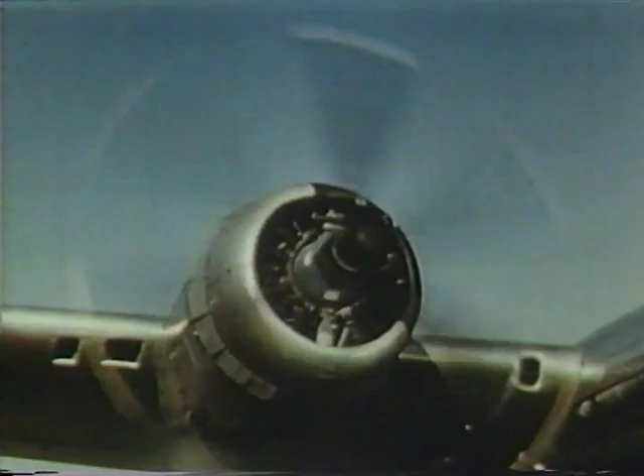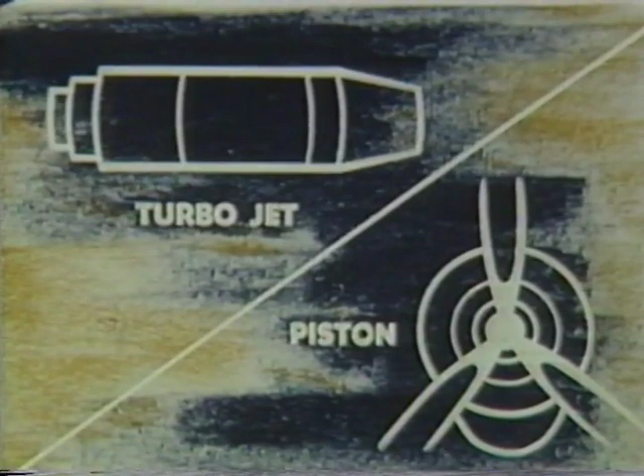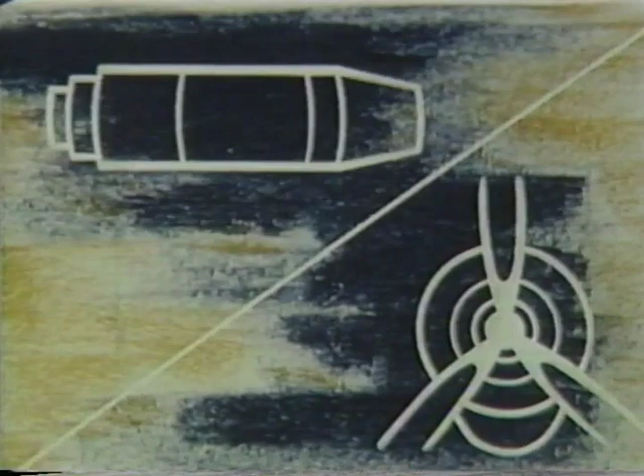For instance, the reciprocating engine is today's most efficient and most complex. The turbojet engine is today's most powerful and most simple in basic power section design. Somewhere in between lies a new kind of power for flight, an engine with the inherent power section simplicity of the turbojet, but providing also the high thrust efficiency of propeller power. And here is the engine designer's solution to the problem: a new kind of power for flight, the turboprop engine.

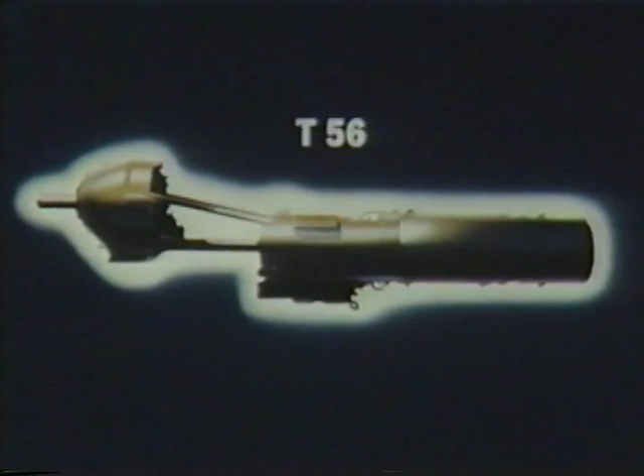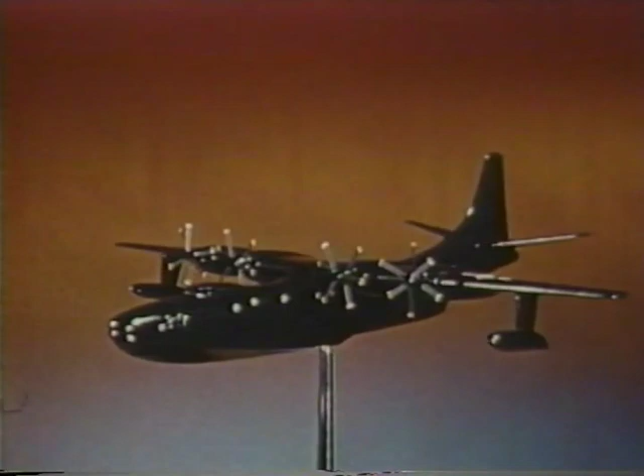More power and speed, less weight and aerodynamic drag, lower fuel costs. Here is power for progress for many types of aircraft, for greater speed, increased payload, shorter takeoff and landing runs, high rate of climb, and most economical overall operation at all altitudes.

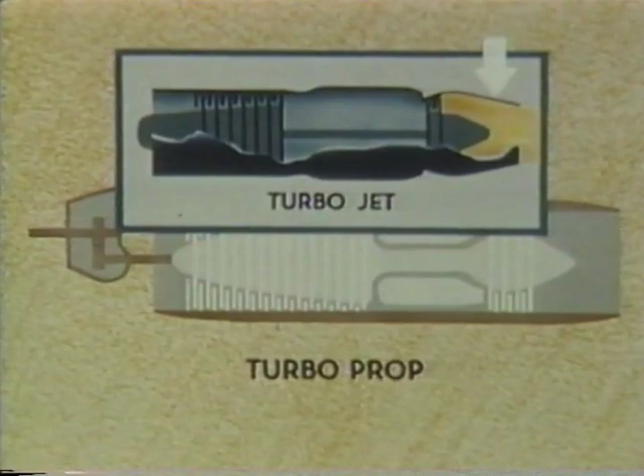A turboprop, like a turbojet, is a gas turbine engine. Air is compressed and delivered to the combustion section. There, fuel is added, and the mixture is burned. The expanding gases release tremendous amounts of energy. In a turbojet, a turbine absorbs only the amount of energy necessary to operate the compressor and engine accessories. The remaining energy becomes jet thrust by reaction from ejection of the exhaust gas at high temperatures and high velocity.

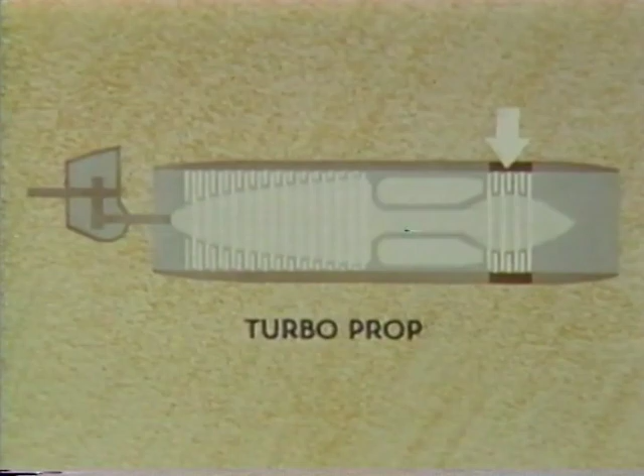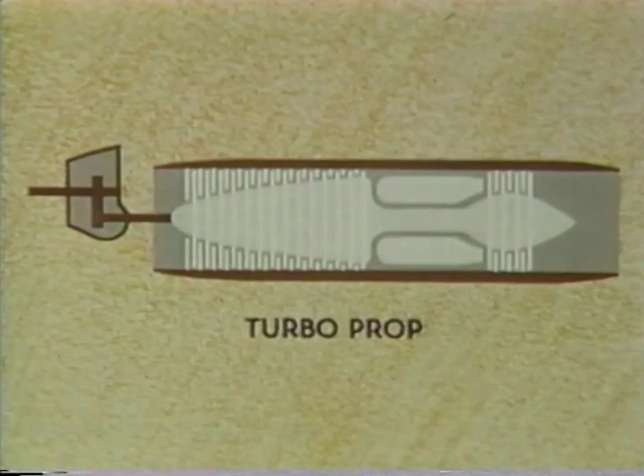In a turboprop, the turbine is designed to absorb maximum energy from the expanding gases. This energy is converted to shaft horsepower and used to drive a propeller through a reduction gearbox, as well as the compressor and engine accessories. About 10% of the turboprop engine's propulsive force is jet thrust, but all the rest, the main propulsive force, comes from the propeller. The turboprop engine has many advantages over the compound reciprocating engine of comparable power.

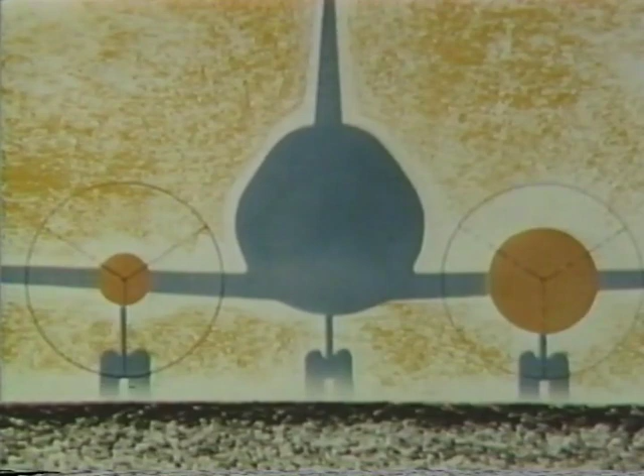First, it has less than one-third the cross-sectional area, and therefore less aerodynamic drag. Second, in terms of power to weight, the turboprop holds a 2.5 to 1 advantage.

The compound reciprocating engine delivers about 1 horsepower per pound of weight. The current turboprop delivers 2.5 horsepower per pound of weight, and this engine has ample room for power growth. Third, the two engines are roughly comparable in the use of pounds of fuel per horsepower per hour, even today.

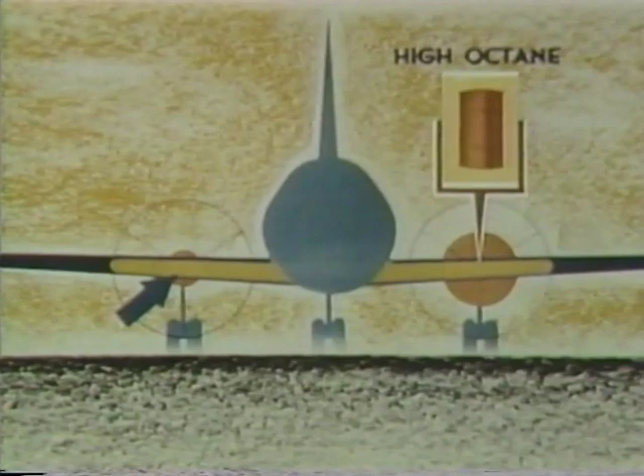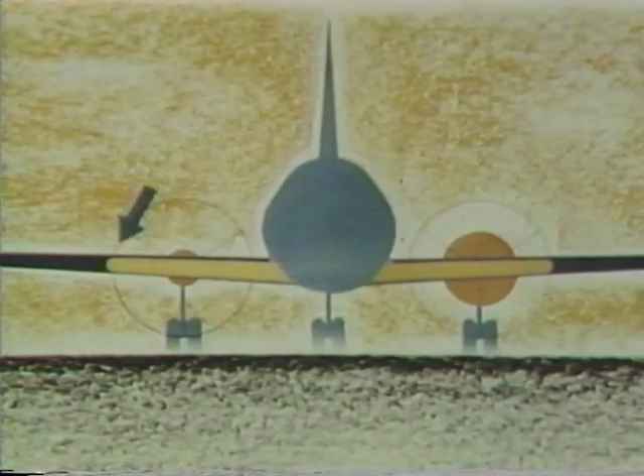But whereas the reciprocating engine requires high-octane gasoline, the turboprop, like the turbojet, can operate on any good turbine fuel, which not only costs less, but is in far greater supply. Moreover, the engine's lower weight permits carrying more fuel load for greater range, or more cargo for a bigger payload, further simplifying logistics. Fourth, in terms of maintenance man-hour requirements, the turboprop offers considerable savings.

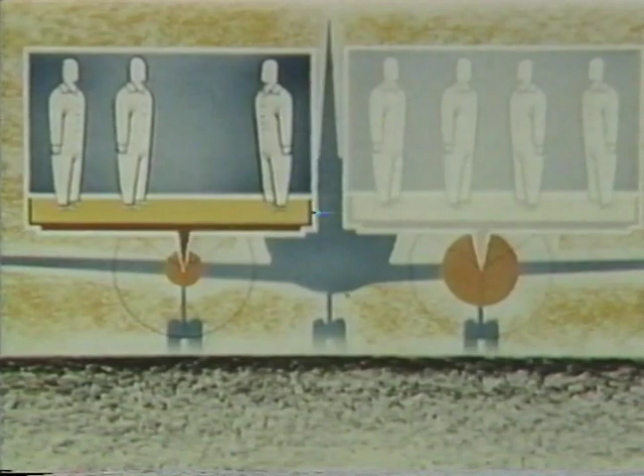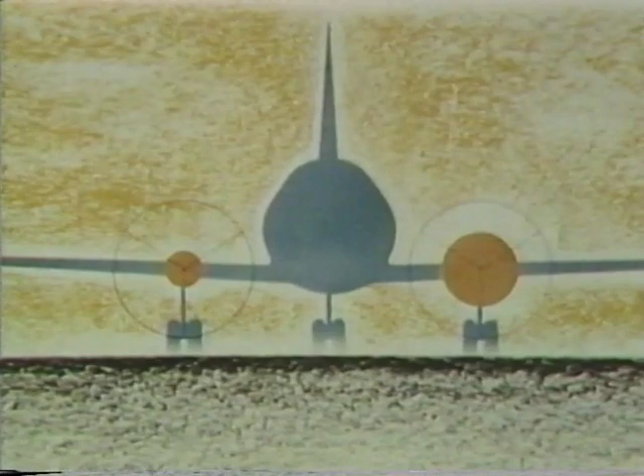There is far less time required for routine check work and minor overhaul on the engine itself, and less work is required on the airframe because of reduced vibration. Fifth, the simpler design of the turboprop results in more horsepower per dollar expended in manufacture. The difference in cost is almost the equivalent of 1 spare turboprop for every 4.

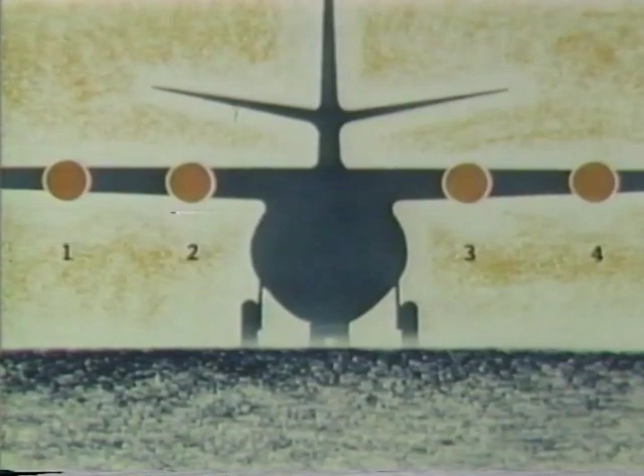These then are some of the advantages of the turboprop engine, advantages which mean progress in aircraft power for air transportation. Let's see how this new kind of power has already reached practical availability.

Development began with a request from the Navy Department, Bureau of Aeronautics. But the request wasn't for a specific engine. It was for any engine that would enable an airplane to meet certain specific requirements.

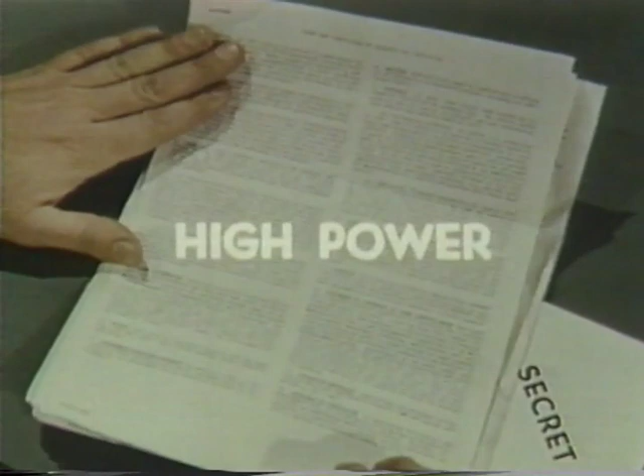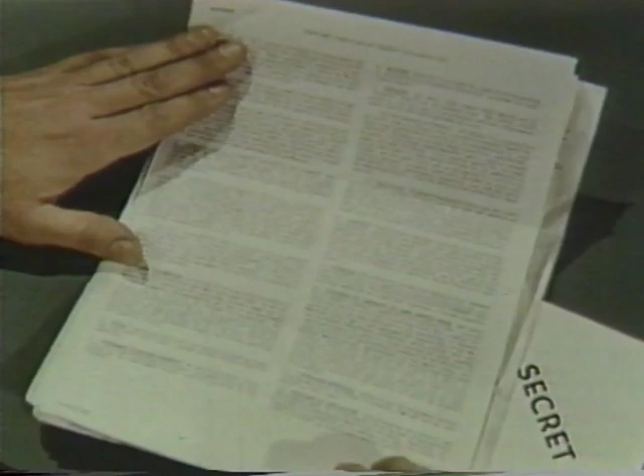This took an engine with high power, low weight, small size, low fuel costs. This request was for an engine which would enable an airplane to perform missions not possible with any known engine.

And detailed study ruled out either the reciprocating engine or the turbojet. And so a new concept was born, the turboprop engine.

The specific Allison proposal was for the T-40, an engine with twin power sections driving a contra-rotating propeller which could be clutched to either or both power sections for unusual flexibility of operation and economical cruise. To expedite development, the T-38 was then designed, with gearbox and propeller driven by a single power section.

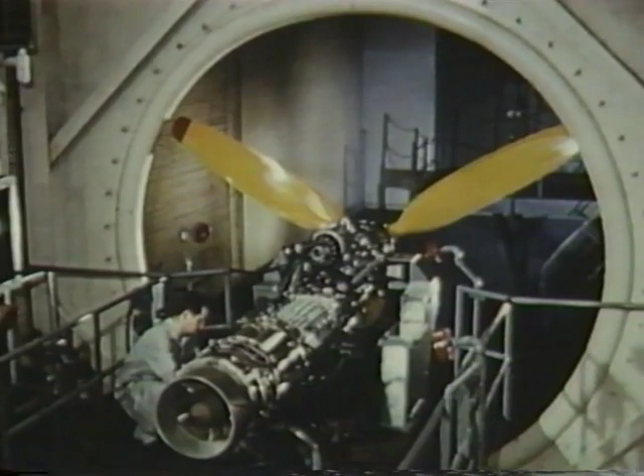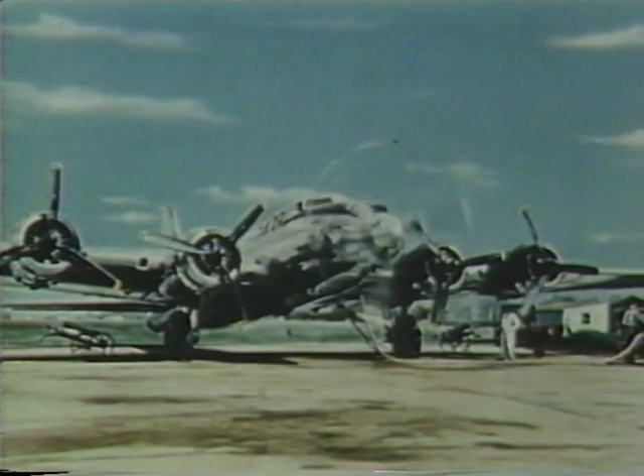Following tests of component parts, testing of the complete unit proceeded until the engine was ready for flight evaluation. A test bed was installed in a B-17. Standard flight evaluation tests were made, including tests for temperatures and pressures throughout the engine. One result of this work was the development of simplified coordinating and propeller controls.

The next step was to prove the turboprop engine as a practical power plant on its own. Military interest in the advantages of turboprop power for both existing and future aircraft had reached the flight test stage. For instance, the Convair XP-5Y flying boat and the Douglas XA-2D Sky Shark. Could turboprop power do a job in these planes?

Let's see. The XP-5Y long-range flying boat, built by Consolidated Vultee Aircraft Corporation, was the first American aircraft to fly wholly on turboprop power. The 4 Allison T-40 engines and dual rotation Aero Products propellers give this 70-ton transport a power-to-weight ratio far in excess of many World War II fighters.

The XA-2D carrier-based attack plane, built by Douglas Aircraft Company, was the first American turboprop-powered bomber to fly. The Sky Shark is powered by an Allison T-40 engine with dual-rotation Aero Products propeller. The XA-2D can carry a greater payload than any known jet bomber or fighter for the same expenditure of fuel.

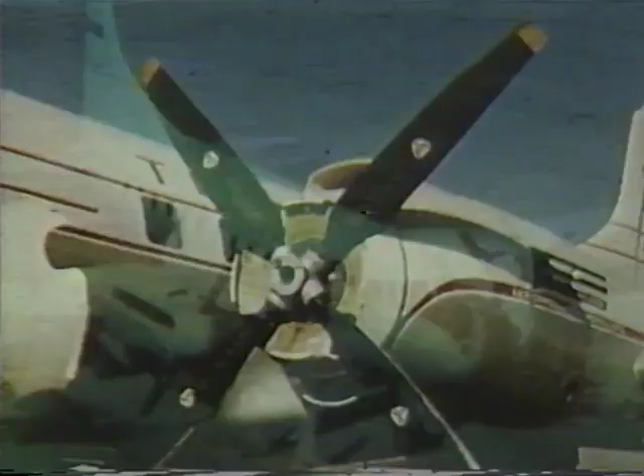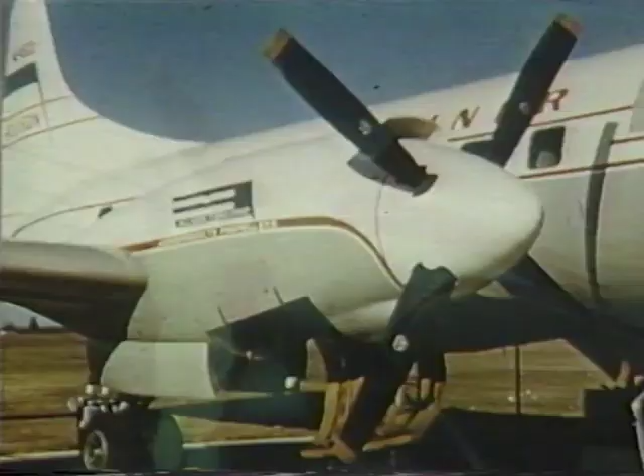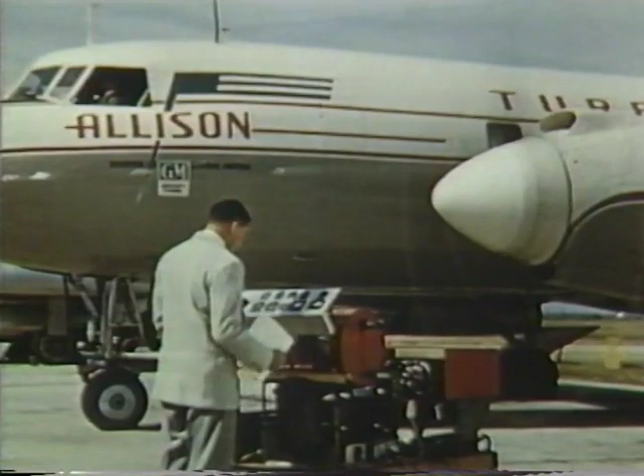In 1950, Allison purchased a standard Convair 240 for test purposes. One T-38 model turboprop was installed in each nacelle by Convair, and this became the Allison Turboliner. Because of landing gear design and other practical considerations, the standard nacelles were used. You can easily imagine how much smaller the nacelles would be in size and cross-sectional area if designed for an optimum turboprop engine installation.

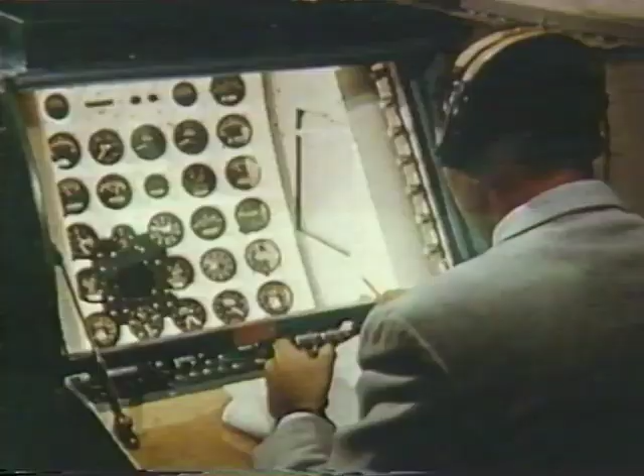Ground running began in November 1950. Three months of vibration and stress analysis uncovered no adverse vibrational characteristics in the engine, propeller, or nacelle. Early flight tests, coordinated with the ground running program, began in December. Flight information accumulated during hundreds of operating hours to date has resulted in further proof of the advantages of the turboprop engine and provided valuable information leading to still further improvements in engine design.

Remember that in the early phases of its development, the advantages of the turboprop engine were largely demonstrated by the T-38 and the T-40. Now let's look at the T-56, an advanced model sponsored by the United States Air Force. Progress in design has resulted in more power, higher possible flight speeds, and improvement in fuel consumption. Let's consider in some detail the specifications and characteristics of this representative turboprop engine.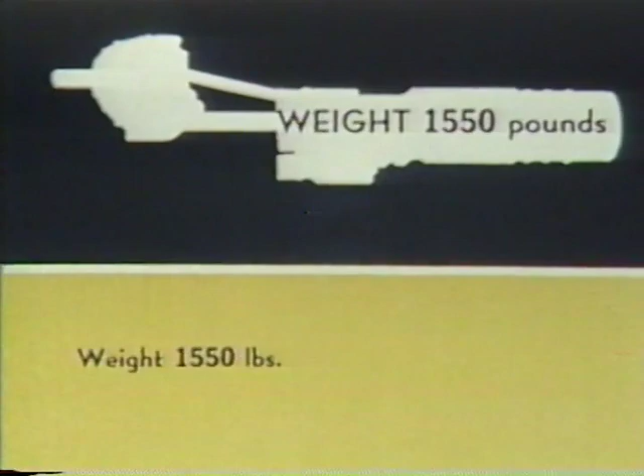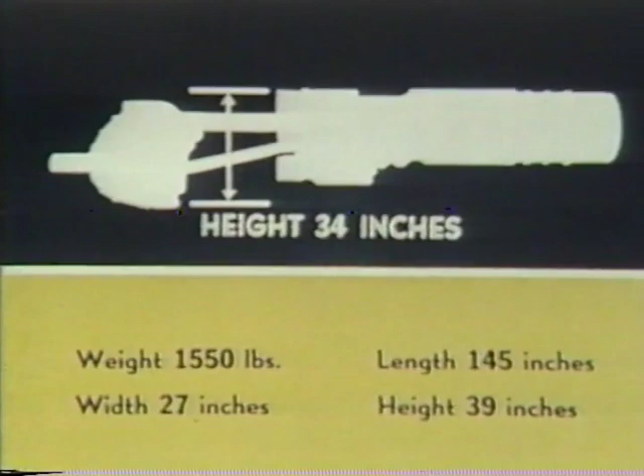Weight is 1,550 pounds maximum. Total length is 145 inches. Width, 27 inches. Height, 39 inches, or 34 inches with the gearbox offset down. This choice of gearbox position, up or down, gives further flexibility to the designer in location of the power plants and centerline of propeller thrust.

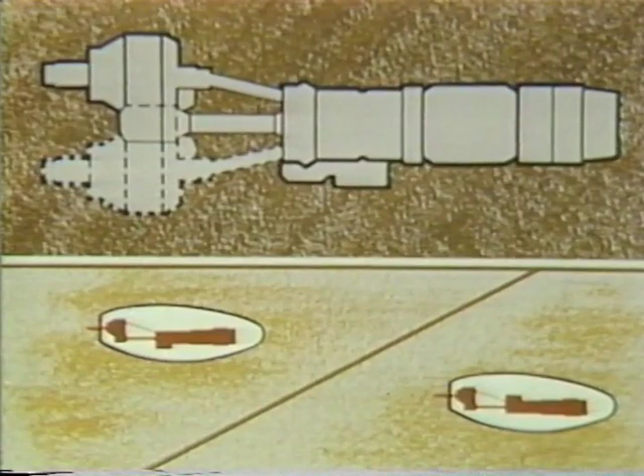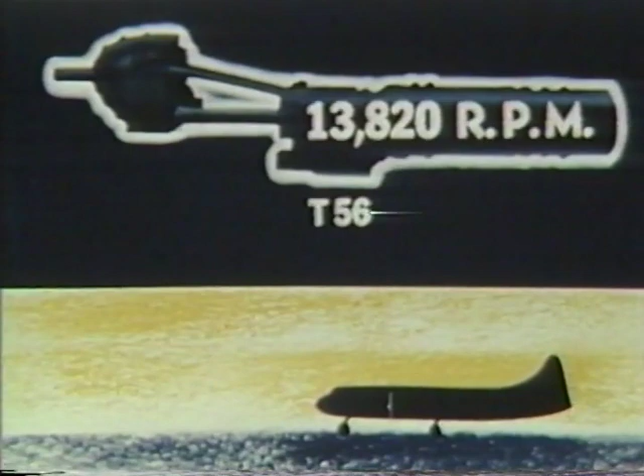As a further option for the designer, accessories may be top or bottom mounted on the power section. A constant speed engine in flight, the T-56 is rated at 13,820 RPM through all operating phases. And here are its power ratings.

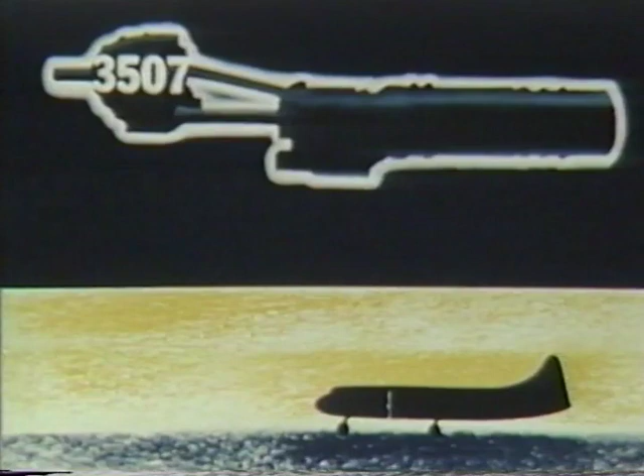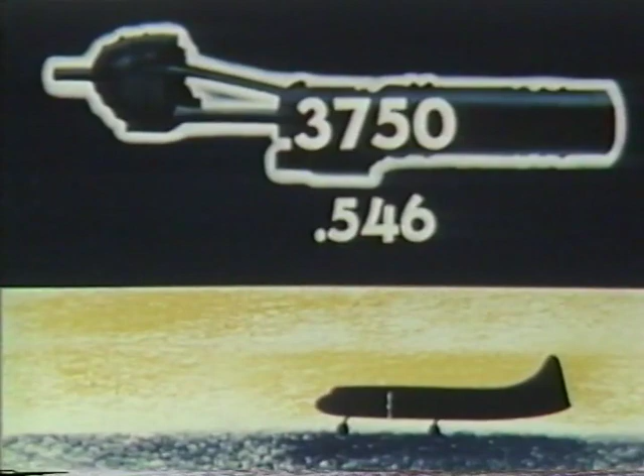First, takeoff power at sea level static conditions. Propeller shaft horsepower, 3,507. Jet thrust, 608 pounds, making equivalent shaft horsepower, 3,750. Specific fuel consumption is 0.546 pounds per hour per equivalent horsepower at takeoff.

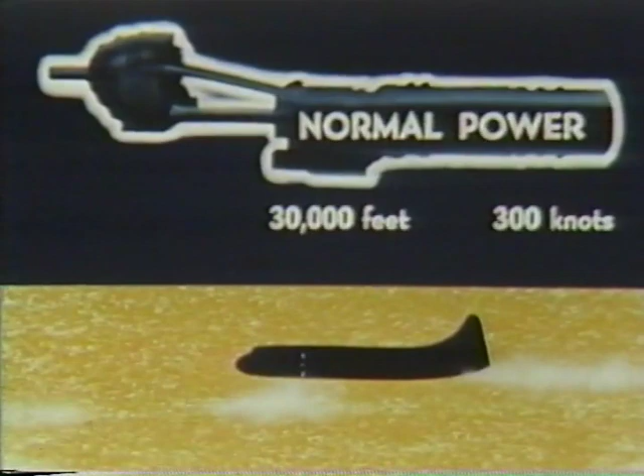Second, normal cruise power at 30,000 feet and 300 knots. Propeller shaft horsepower, 1,750. Jet thrust, 125 pounds, making equivalent shaft horsepower, 1,875. Specific fuel consumption is 0.450 pounds per hour per equivalent horsepower at this operating condition.

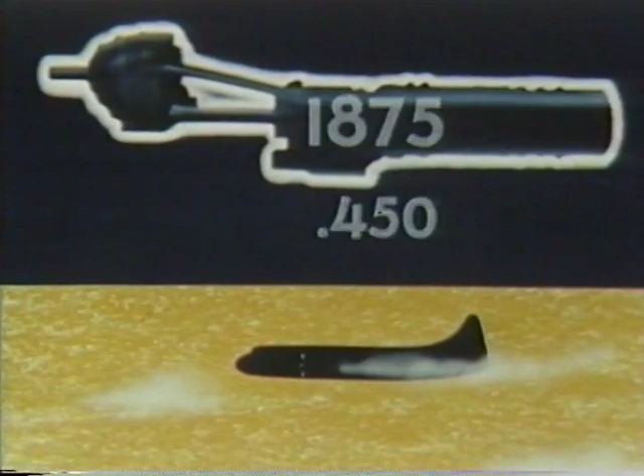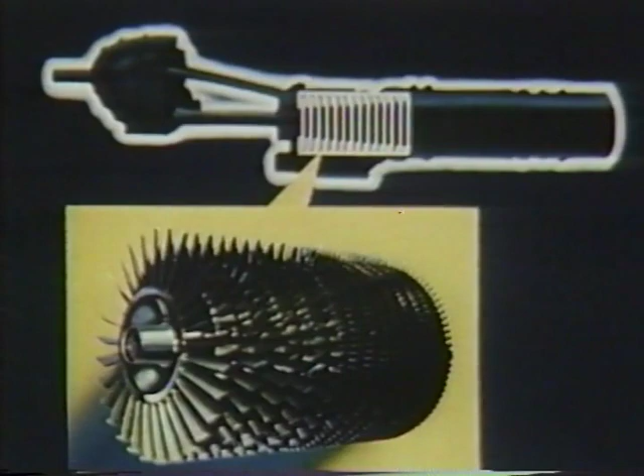The 14-stage all-steel axial flow compressor handles more than 30 pounds of air per second at a compression ratio of more than 9:1. The combustion assembly consists of 6 inner burners within a steel outer shell. Individual fuel nozzles feed each inner burner. Once started, burning is continuous.

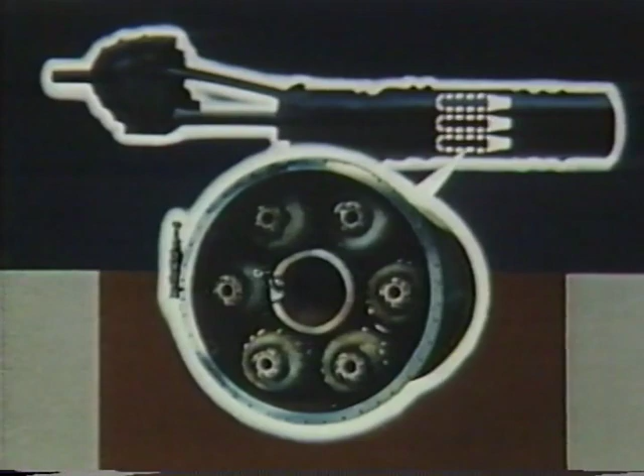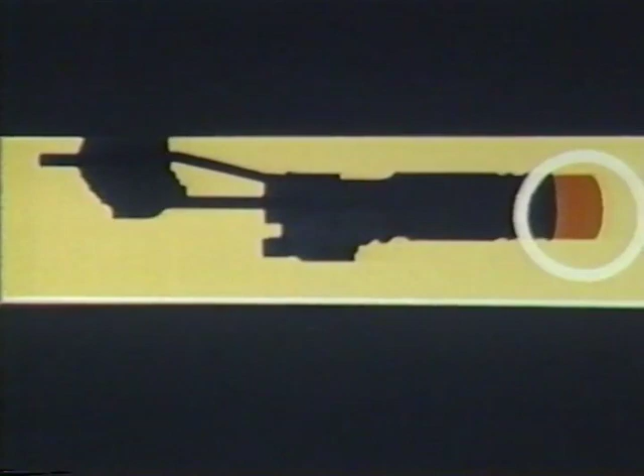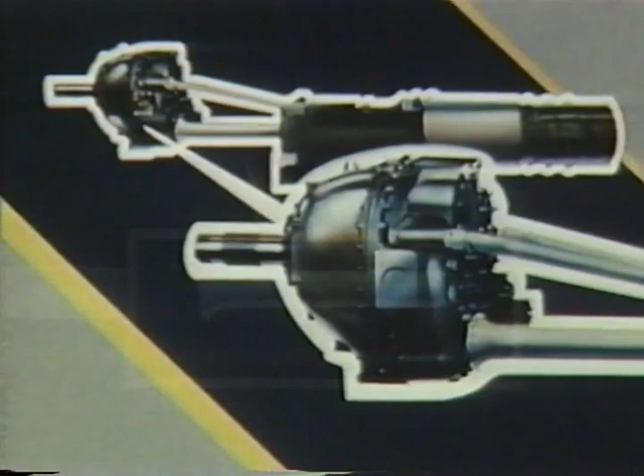Most of the energy from the hot gas is absorbed by the 4-stage turbine. The remaining energy results in thrust as the gas is ejected. The power section drives the integrally mounted reduction gear assembly through an extension shaft. In a 2-phase step-down, the reduction gear assembly reduces power section speed to optimum propeller shaft speed in a ratio of 12.5:1, from 13,820 RPM down to 1,106 RPM.

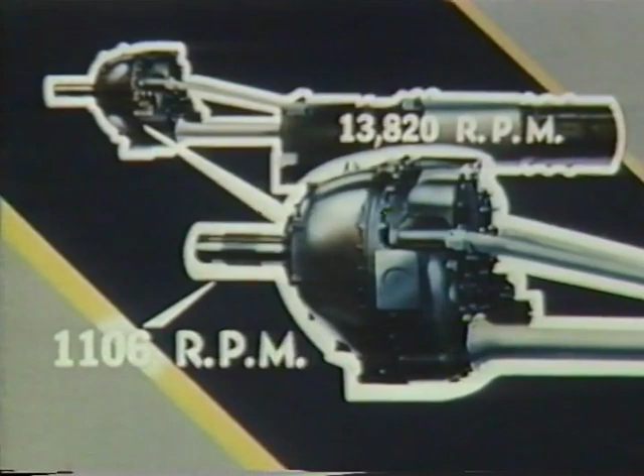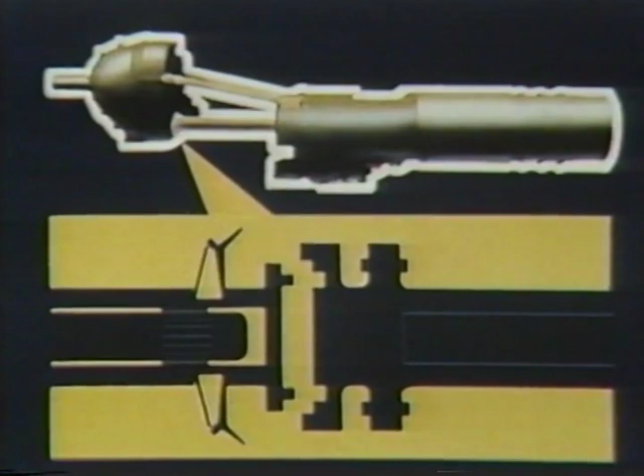At the point of connection between gearbox and extension shaft, a safety coupling is provided. It automatically separates gearbox and power section if ever a negative torque of predetermined magnitude should be transmitted through the propeller. The safety coupling automatically re-engages when the gearbox speed matches that of the power section.

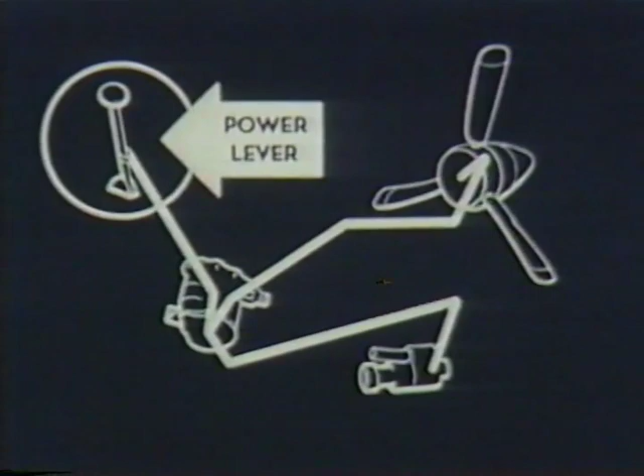The pilot has to move nothing but the power lever to change the power setting for a particular operating condition. Power adjustments are made through the engine coordinating control, which automatically coordinates fuel flow and propeller blade angle. The engine fuel system features a dual fuel pump arrangement.

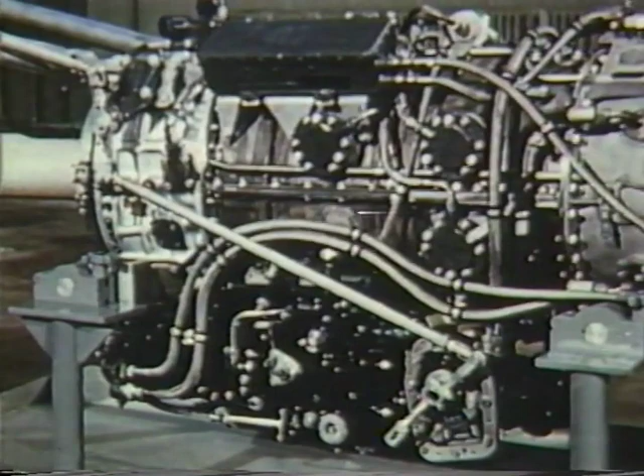Now let's consider what all these advantages of the turboprop engine mean in terms of operational characteristics. For instance, operational simplicity. The piston engine pilot has many operating controls to keep in manual coordination for every phase of operation, from starting to landing.

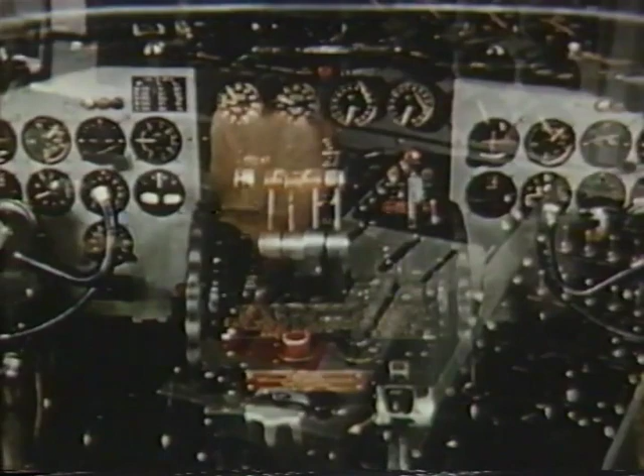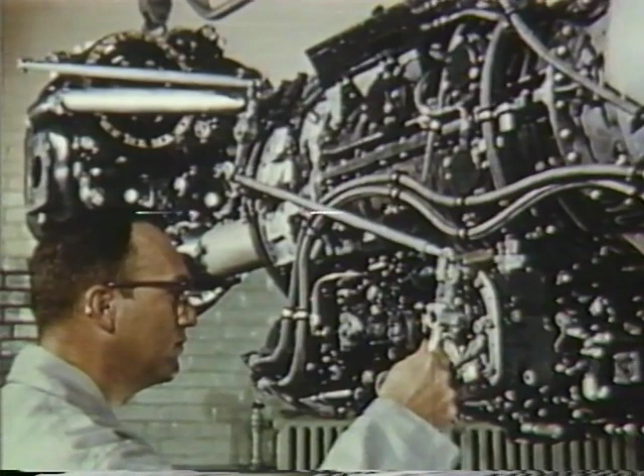The turboprop pilot has but one operating control, the power lever. A mechanical electrical coordinating control mounted on the engine automatically provides for all requirements of ground and flight operation.

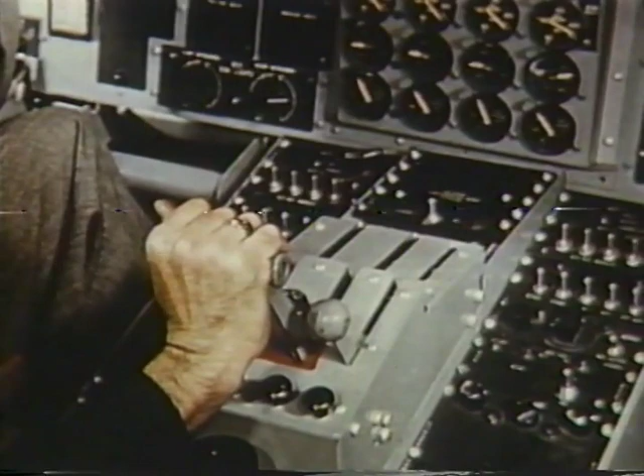The pilot, in turn, is automatically provided with a full range of thrust selection, from zero to maximum positive, and from zero to maximum negative. We shall see how useful this is in a moment.

Here's another operational characteristic. In flight, the Allison turboprop is a constant speed engine, while in ground operation, engine speed is variable. And starting is simplicity itself.

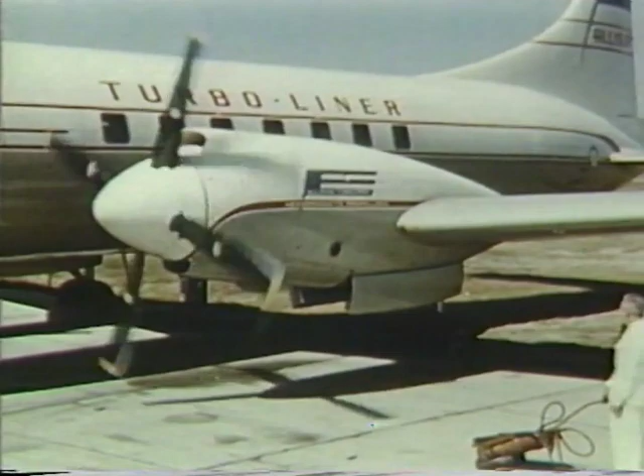After the normal presettings are made, the pilot simply selects Start with the power lever, then pushes the start switch. Now a self-contained starting unit takes over. In a matter of seconds, the engine fires up and stabilizes at ground idle RPM.

At this operating condition, the propeller is delivering zero thrust. The extremely useful range of thrust selections soon becomes evident. Complete control of the airplane is achieved through smooth, continuous changes in thrust values, from positive to negative.

For instance, takeoff runs in the Allison turboliner have measured out to less than 2,000 feet. Rate of climb is 2,500 feet per minute at an indicated airspeed of 220 miles per hour.

Instantaneous availability of full thrust is especially important in go-arounds. With the constant speed turboprop engine, full takeoff power is immediately available for emergencies.

During letdown, coordinated control between the fuel regulator and propeller permits a steep angle of descent. As the power lever is retarded, the coordinated effect of reduced fuel flow with the propeller governing to maintain 100% RPM sets a high engine speed and flat blade angle, which produces the desired braking effect on the airplane.

Immediately after touchdown, moving the throttle back to the start position sets the propeller to minimum torque blade angle, markedly increasing the drag effect.

Now, to further shorten the landing run, the pilot selects reverse thrust. Up to 80% of takeoff power is available in the reverse regime.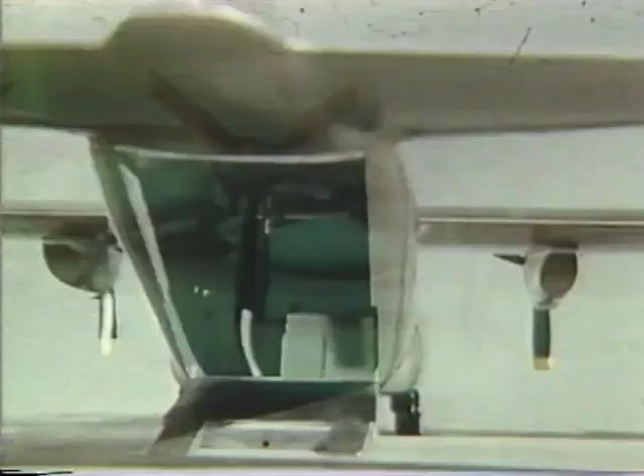The first United States Air Force transport designed specifically for turboprop engines is the Lockheed C-130, powered with 4 Allison T-56s. Planes like this can fly faster and higher for high-speed, long-range personnel transport, as cargo planes for heavy equipment, as hospital planes for litter cases.

And thanks to shorter takeoff and landing runs, they can operate in unimproved forward areas.

Another application of turboprop engines in the transport field is the C-131C, a conversion of the twin-engine Convair 340 to Allison T-56s. Usefulness of turboprop transports is not limited to military application. Commercial operators also look to these new type aircraft to carry greater loads at higher speeds and with better economy.

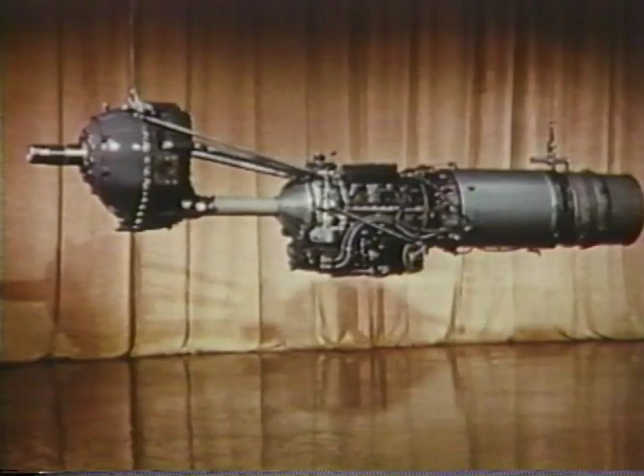But the future of turboprop engines has only begun. The basic power section can be adapted for marine power, stationary power plants, the helicopter, and other vertical takeoff requirements. For all high-speed, load-carrying flight requirements, it seems inevitable that turboprop engines will supplant piston engines in military and civilian aircraft.

The Allison turboprop engine, simple, compact, and powerful, opens new horizons of power, efficiency, and performance. It's today's power, today's new power for flight.